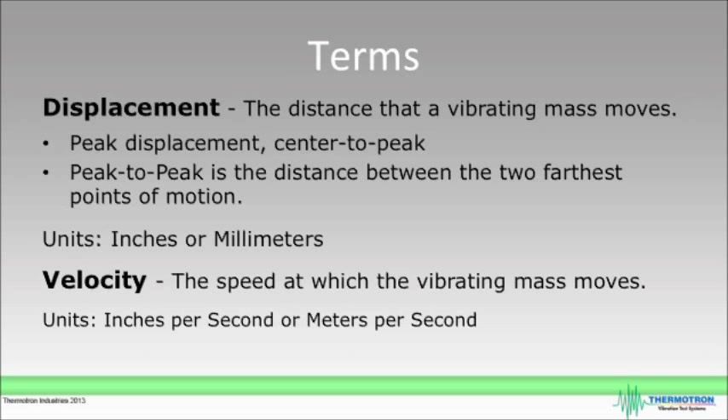Velocity is the speed at which the vibrating mass moves, measured in inches per second or meters per second. Acceleration is the rate at which the vibrating mass changes speed. It is measured in g-peak for sine and shock testing, and GRMS, which means the root mean squared acceleration, for random, sine on random, and random on random testing. Frequency is the number of times an oscillation occurs in a period of time, measured in hertz or cycles per second.

Mass is the amount of matter contained in a body or product, measured in pounds or kilograms. Force is the applied energy causing motion or a change in motion, measured in force pounds or newtons. Power spectral density is the measurement of amplitude and frequency in a random vibration spectrum. Amplitude is measured on the y-axis in g squared per hertz, or meters per second squared per hertz. Frequency is measured on the x-axis in hertz.

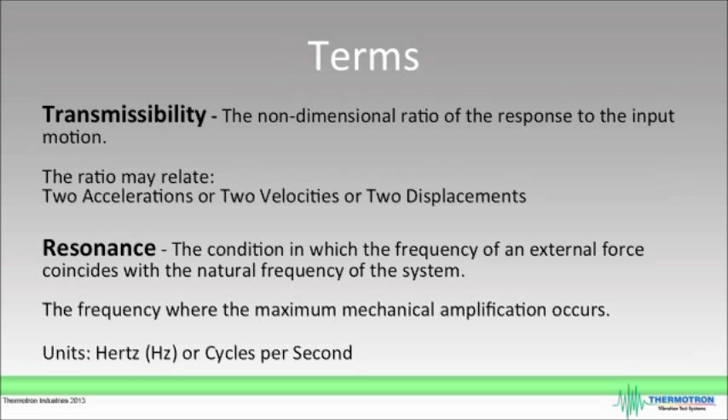Transmissibility is the non-dimensional ratio of the response to the input motion. The ratio may relate to accelerations, velocities, or displacements. Resonance is the condition in which the frequency of an external force coincides with the natural frequency of the system, measured in hertz or cycles per second.

Highly accelerated life testing, also known as HALT, applies increasingly higher levels of stress to force product failures. HALT uses multi-axis vibration and high thermal ramp rates significantly beyond the product's normal use environment to expose product weaknesses quickly. Using high levels of stress causes significant time compression and exposes the same failures experienced during normal use over a product's lifetime.

Highly accelerated stress screening, also known as HASS, is a production quality screen that applies similar but lower stresses to those used in HALT. HASS levels are determined by results found in the HALT process. HASS aims to verify that production units are manufactured as designed and quickly detects component or manufacturing irregularities. This screen is tuned so that it detects weak points while still leaving expected field life in the shipped product.

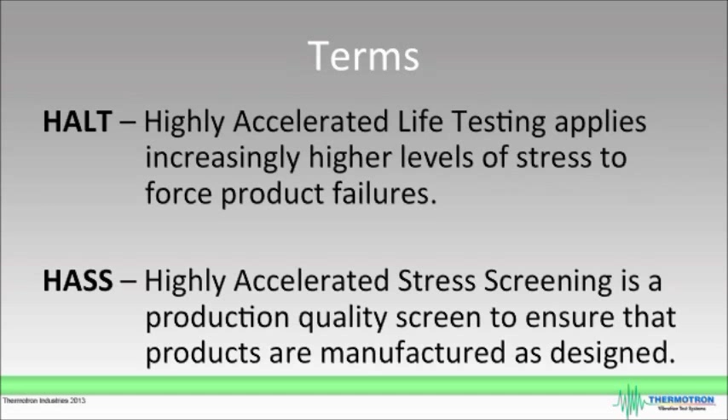Now Eric will discuss the different types of electrodynamic and repetitive shock vibration. Thanks, Jane. Here are some common tests that can be performed with electrodynamic vibration: sine, random, classic shock, and SRS shock, resonant search and dwell, random on random, sine on random, and RDAP. Each test is intended to produce a different real-world response.

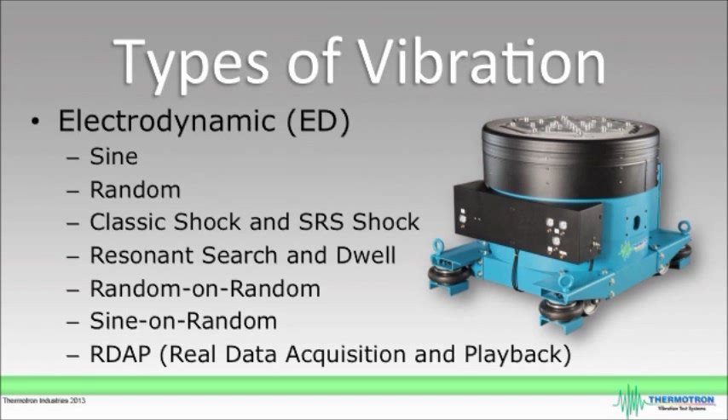Random vibration is when amplitudes and frequencies are randomly occurring functions and not repeatable over time. The noise source is shaped to represent the environment in which the article will operate. Random vibration is used to closely approximate real-world application environments. A wide range of frequencies are excited simultaneously at closely controlled energy levels.

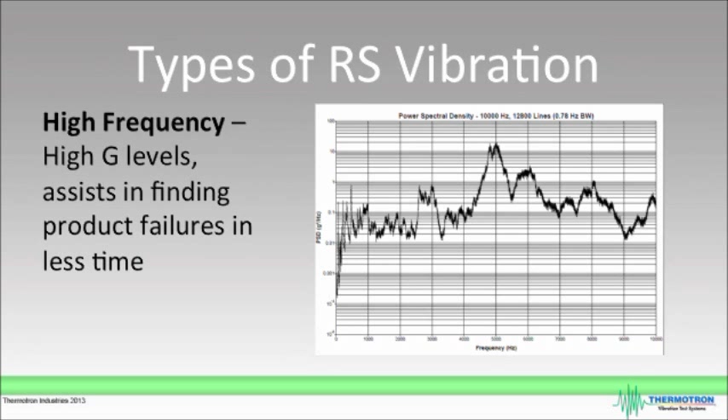In the high-frequency mode, impactors are controlled to produce high-frequency energy. The graph shows a frequency response between 0 and 10,000 Hz. Energy builds after 2500 Hz in this mode. The high-frequency mode is intended to find product failures faster.

Synchronized shock is a Thermotron exclusive vibration mode that performs multi-axis shock testing by synchronizing the impactors to hit at a controlled frequency and intensity. This mode offers up to 1500 G peaks, giving it the ability to force failures that might not occur in other excitation modes.

Now Jane will cover the differences between electrodynamic and repetitive shock vibration.

Electrodynamic vibration excites three axes sequentially, one at a time. It's an electromagnetic response, much like a subwoofer in a car stereo system. Repetitive shock excites all three axes simultaneously, all at once, using pneumatic impactors, similar to a hammer, to produce its response.

Breaking down the electrodynamic vibration system into its simplest form would be comparing it to a large, powerful industrial-strength stereo system. Using a vibration control system, which is like the CD player, a signal is sent through to the amplifier, which is similar to the amplifier used in a home stereo, to the shaker, which is like the speaker, where the armature, comparable to the speaker's woofer, moves up and down or back and forth in a magnetic field.

An added element to the vibration system is an accelerometer that senses the output of the shaker and sends this signal back to the controller for fine-tuning. The controller in turn sends a drive signal back to the amplifier, which provides accurate closed-loop control and spectral shaping of the test being performed.

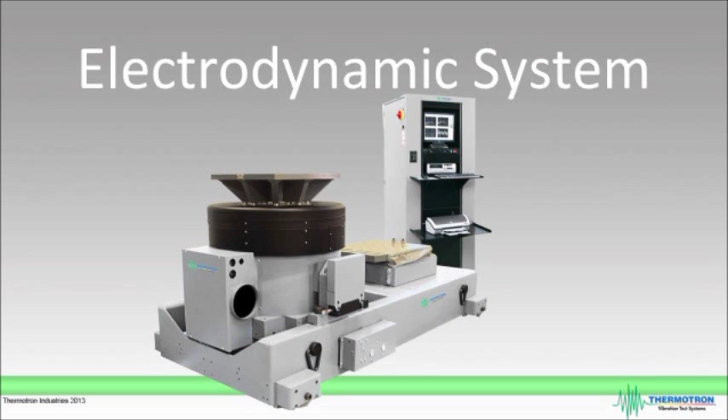A product can be damaged or over-tested if it is larger than the size of the armature. A head expander alleviates this problem by increasing the product mounting area. Head expanders are typically made of magnesium because of its lightweight and stiffness properties.

A slip table assembly is used when vibration is required in the horizontal axis. The shaker is mounted in a unified base with the slip table assembly, illustrated on the screen. The solid mount trunnion rotator connected to the unified base allows the shaker to be rotated 90 degrees, which is aided by a driver bar.

Oil is pumped between the slip plate and granite slab so it can smoothly move back and forth, creating surface tension so the slip plate and granite slab don't separate or slap against each other. Isolators help prevent vibration transmission from the shaker to the facility floor.

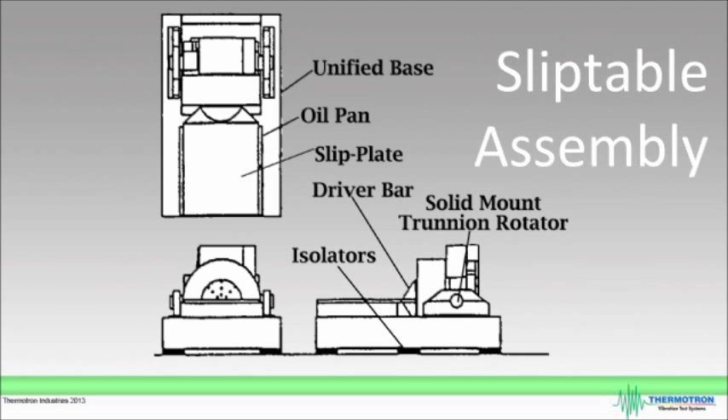Shown here is an electrodynamic and repetitive shock vibration graphical comparison. On the left is a graph of a random test from an electrodynamic shaker testing a product on one axis. The yellow lines are the tolerances of the profile, and the red lines are the abort limits.

You will notice that the profile output is controlled by the user. The power spectral density output of a repetitive shock shaker is shown in the graph on the right. The three colors represent a product being tested on all three axes simultaneously. The output of repetitive shock vibration tests is random.

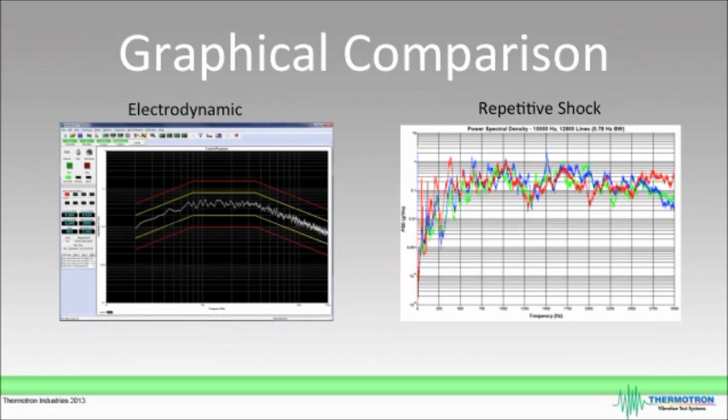The goal of electrodynamic vibration is to simulate real-world environments. The goal of real-world simulation testing is to pass the test, ensuring all products, including production units, are up to quality standards and ready for consumer use.

Repetitive shock vibration uses high stresses to stimulate product weaknesses or flaws quickly. The goal of repetitive shock vibration is to test the product until it fails. Small electronic subassemblies, as well as more complex mechanical assemblies, are just an example of what can be tested using repetitive shock vibration.

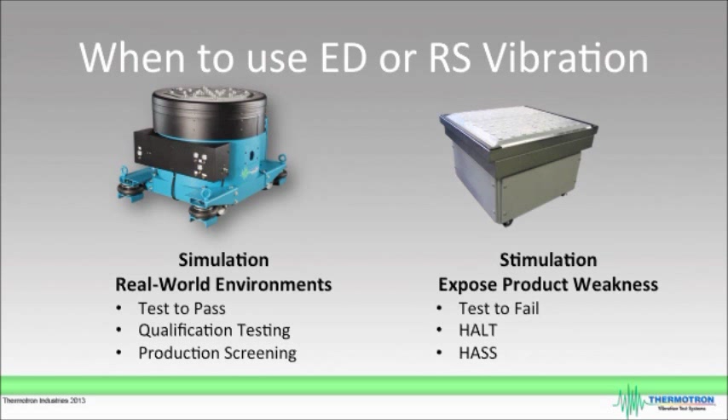If a user is working from a specific specification, it will tell you if you should be using electrodynamic or repetitive shock vibration. Here are some common specifications for electrodynamic and repetitive shock vibration. There are many specifications specific to electrodynamic vibration in order to simulate the real-world environments products will encounter. There are fewer specifications for repetitive shock vibration because they are typically custom-tailored to specific products.

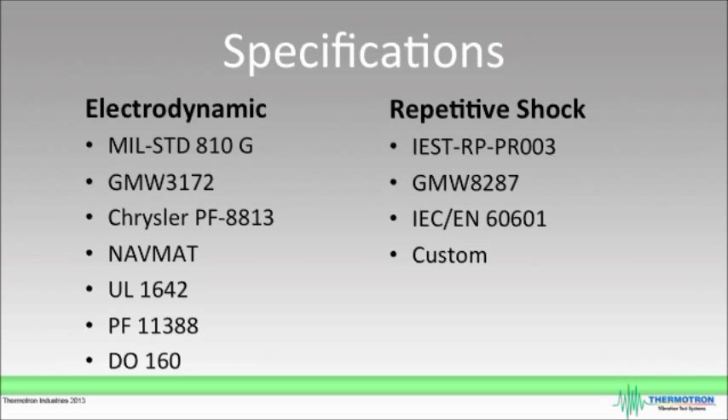Fixtures are adapters that attach to the armature or table to which the product is mounted. A vibration fixture needs to be rigid and lightweight. The vibration fixture should transmit a uniform distribution of energy from the armature to the test item.

In many cases, vibration is applied in all three axes. Specialized vibration fixture designs permit the fixture to be rotated for testing in the X, Y, and Z axes. It is common to find the weight of a fixture to be 2 to 3 times heavier than the products being tested. Fixtures should mount easily to the armature or table, and products should easily mount to the fixture.

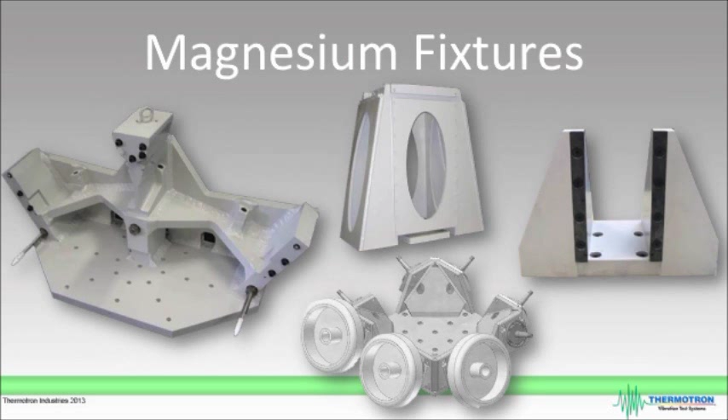Quick changes from product to product and axis to axis help to maximize equipment utilization and improve lab productivity. Standard fixture kits and custom designs are available from Thermotron.

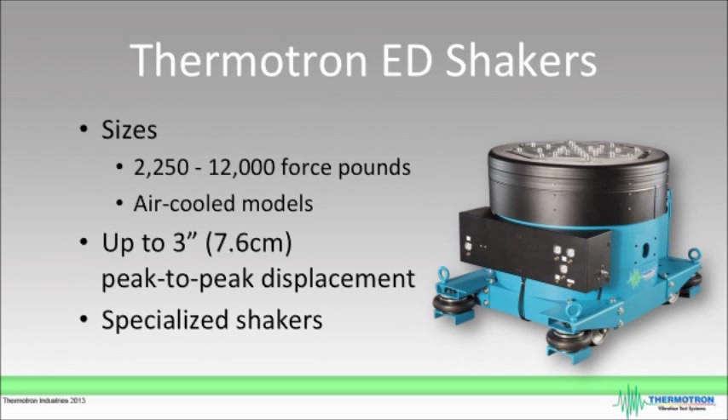Thermotron's electrodynamic shakers have superior performance. The robust armatures are lightweight and durable, ideal for obtaining maximum acceleration levels. The dynamic centering system is driven by compressed air that consistently and constantly maintains the armature centering. The fully adjustable magnetic field strength optimizes shock performance. It is automatically adjusted by the control system to save energy during operation.

To keep up with preventative maintenance and to minimize production downtime, Thermotron field service engineers are factory trained. We have service engineers who are electrodynamic and repetitive shock vibration experts.

Repetitive shock table sizes range from 16 by 16 inches with 4 impactors up to 48 by 48 inches with 16 impactors. Standard payload capacities range from 300 to 1,500 pounds. Additional weight capacities are available. Specialized table sizes are also available, for example the 48-inch by 60-inch table.

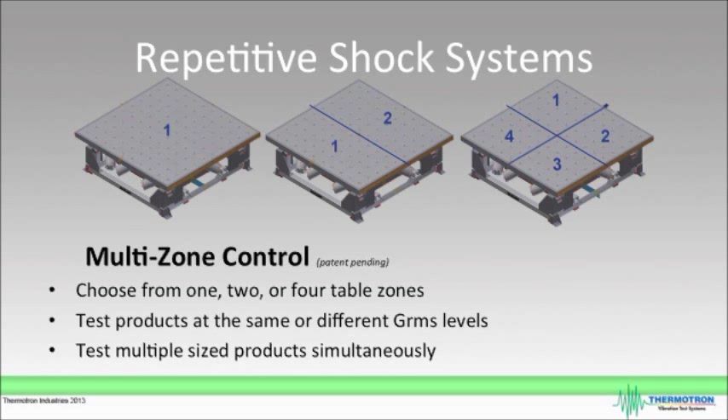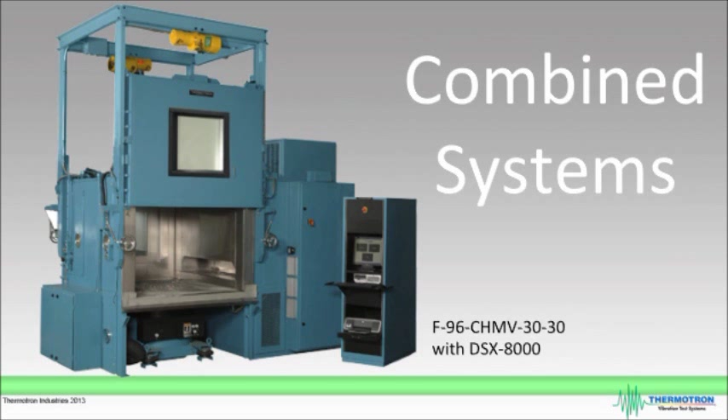Thermotron is the only manufacturer of environmental test chambers, electrodynamic shakers, and repetitive shock shakers. Pictured here is an AGREE chamber with mechanical refrigeration that interfaces with an electrodynamic shaker. This custom chamber can also interface with a repetitive shock shaker, giving a cost-effective solution for multiple testing needs.

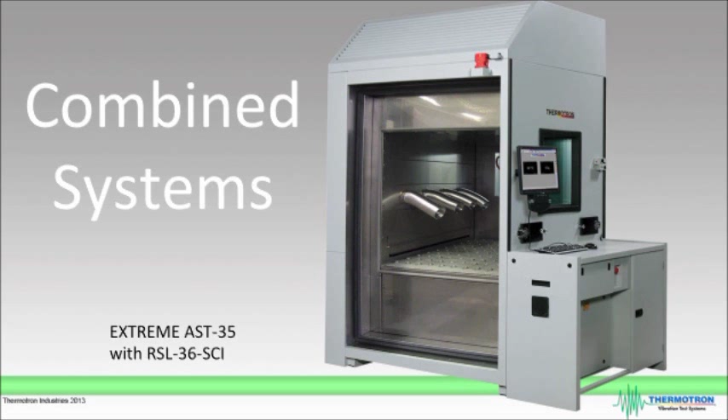Thermotron's accelerated stress testing equipment for HALT HASS utilizes extreme temperature change rates using liquid nitrogen in combination with repetitive shock vibration to force failures more quickly than traditional testing methods.

The RSL-16 portable shaker is an integrated portable shaker that utilizes the universal port on SE series chambers for temperature, humidity, and repetitive shock vibration. This is a cost-effective way to introduce HALT HASS. The shaker was designed to be used in a chamber for full air movement around the product, and can be used in the chamber's full temperature range from -70 degrees C to 180 degrees C.

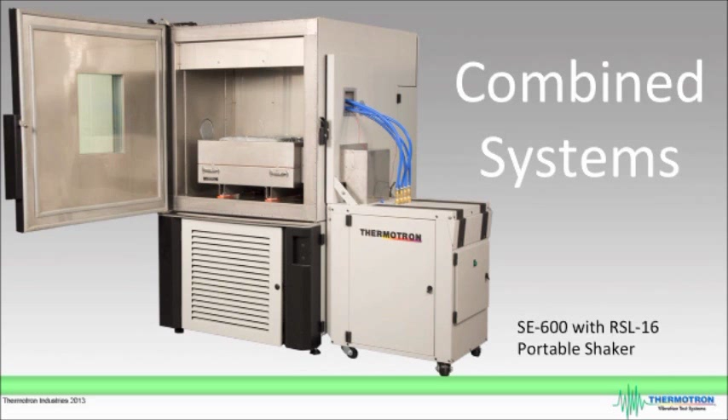Thermotron software engineers develop all aspects of the controller in-house to be intuitive, secure, and robust. All functions of the test, temperature, humidity, and vibration levels are displayed on one screen. Thermotron controllers have USB and Ethernet connections for quick and easy access to data, making the tasks of data mining and manipulation quick and effective. With the appropriate software, vibration controllers are capable of reproducing the various vibration test types previously mentioned in this presentation. Free controller software updates are available via thermotron.com.

For electrodynamic vibration, Thermotron offers the VCS 3200 as a standard controller. We include software packages such as sine, shock, and random tests. Thermotron's repetitive shock vibration controller for the full Extreme AST system is the AST 8800. The power spectral density software package is included with the controller. The 8800 controller is standard on SE series chambers that supports temperature and humidity. When the chamber is equipped with the RSL-16 portable shaker, the 8800 includes G levels on the main screen.

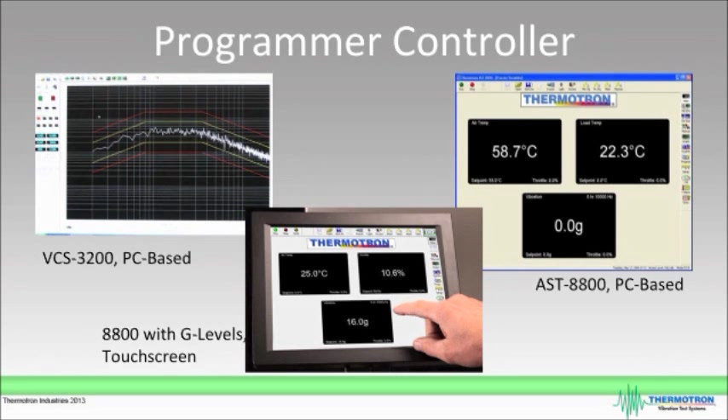We understand that your products or tests aren't always standard. So why should your test equipment? Thermotron specializes in custom applications. The 8,000 force-pound shaker on the left has two slip tables. The larger table interfaces with the chamber for combined environment testing. The smaller table is used for the 100G 11 millisecond automotive spec with a 100-pound payload, horizontally.

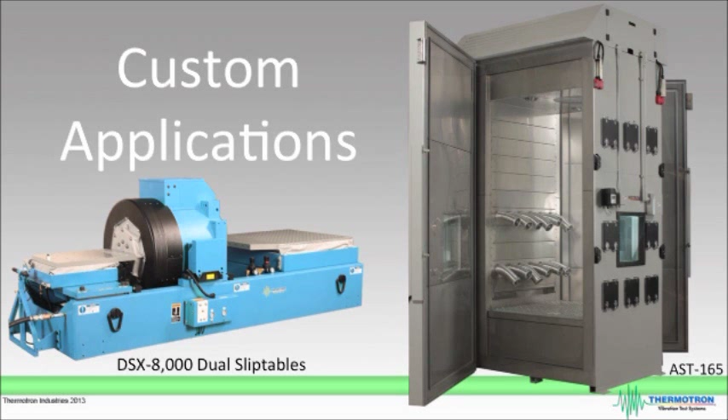The AST-165 on the right is the tallest chamber ever engineered and manufactured by Thermotron, with an RSL-48 shaker. This was built to accommodate extra tall and heavy products under test.

To summarize today's presentation, vibration testing is an essential part of the R&D, production, and real-world simulation phases. Electrodynamic and repetitive shock vibration testing are used by many industries including, but not limited to, electronics, automotive, telecommunications, energy, aerospace, defense, semiconductors, and home appliances. Both types of vibration are meant to produce different responses. From this presentation, we have hopefully given you enough tools to be able to determine which vibration type is best for your application. Thermotron offers electrodynamic and repetitive shock shakers and combined environment systems with state-of-the-art controllers.